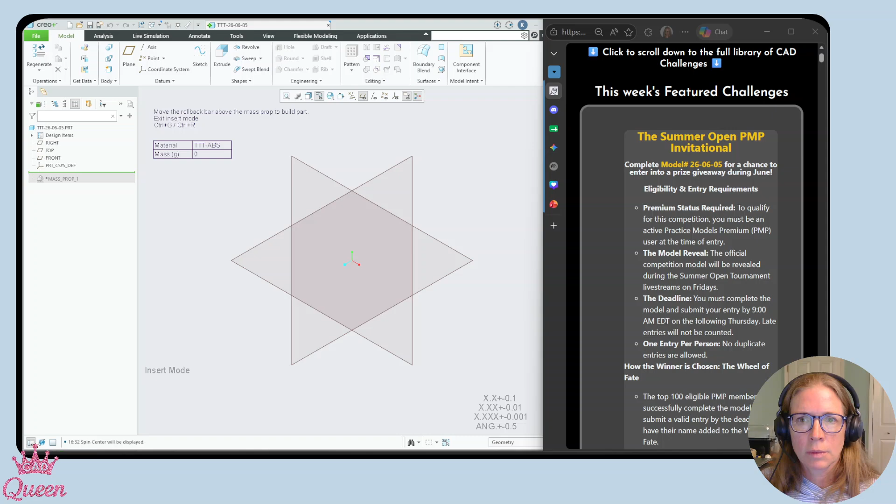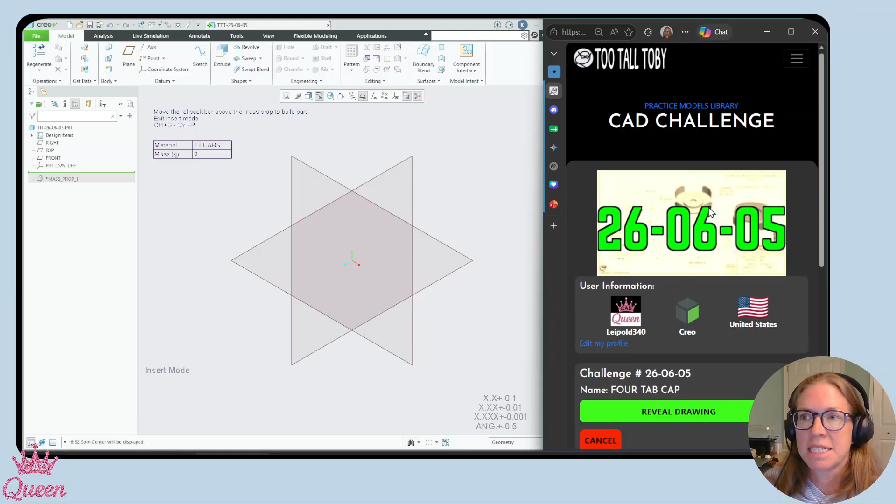260605. I have not tried this, I haven't done this yet. Jumping right in, we'll see how it goes. So we are in grams, and the average solve time is 7 minutes, so let's see how we do.

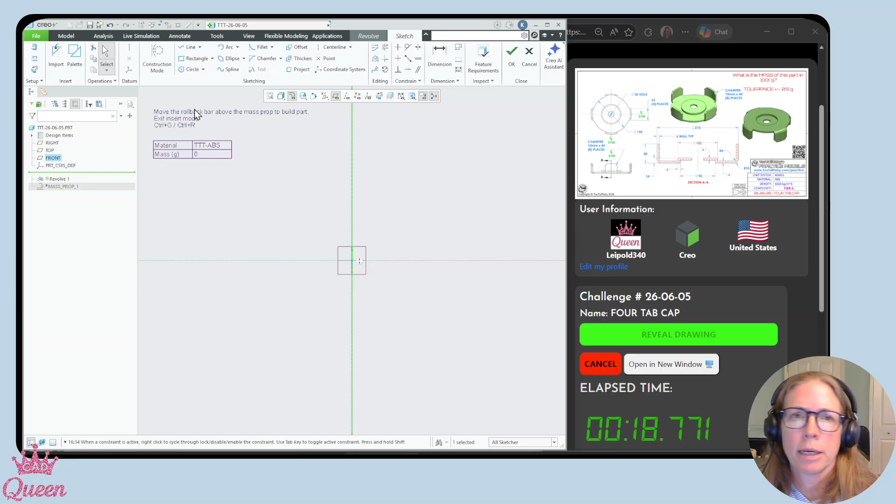All right, so I think I'm going to revolve. Actually, it looks kind of sheet metal-y, but I'm still going to revolve. It's got circles. All right, outer diameter - let's go with thin wall revolve and see what happens.

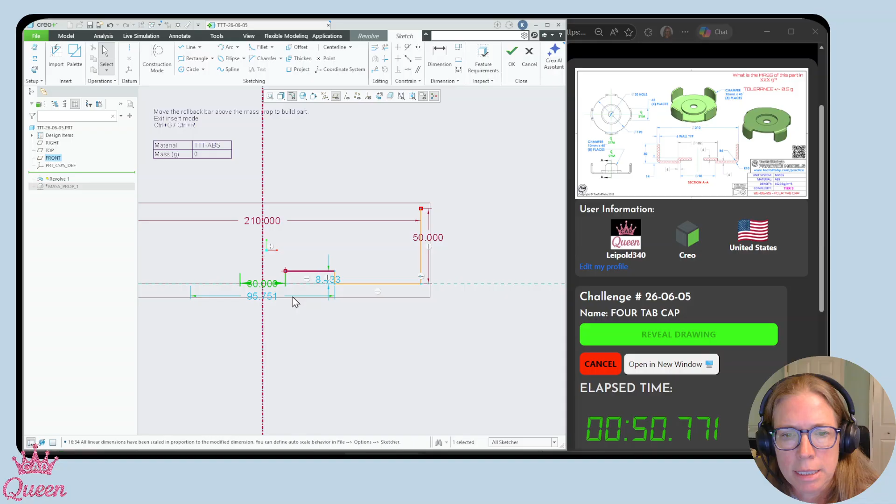210. Overall height is 50. Let's see here, our inner hole is 30. We got 90 on the inside, which I believe is this one when we add the wall thickness.

I think we might have to do some verification and see how we do, because this 14 includes the wall thickness, and the wall thickness is 6. So we'll actually make this 14 minus 6.

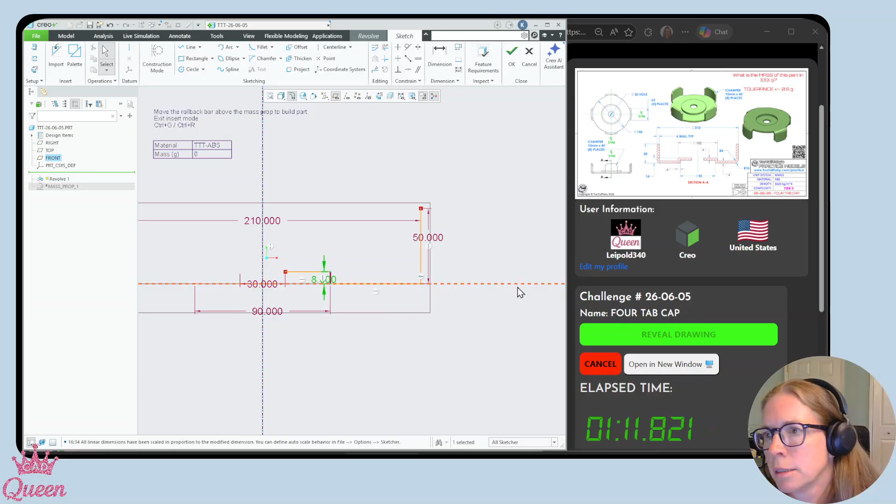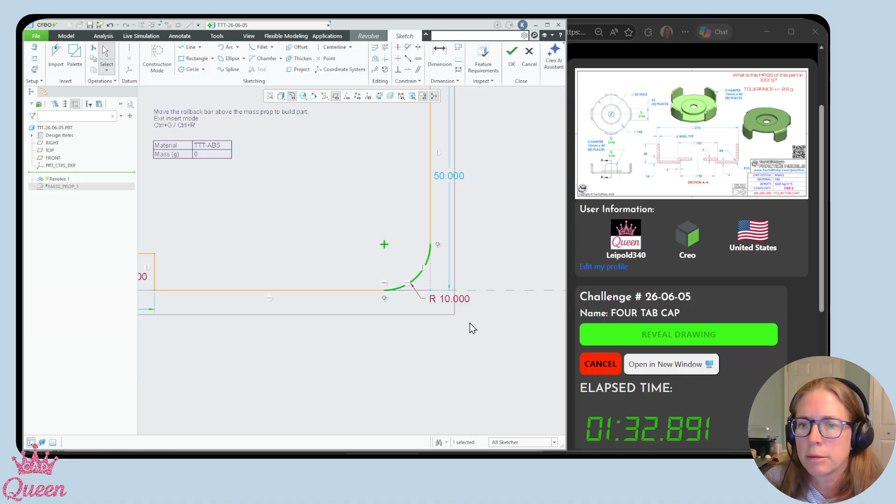And we got one round, so 10 on the outside. So let's pick that corner, drop a fillet, and there we go. Make that 10. All right, I think all the dimensions left the same, so let's click OK.

I got a pop-up over here on the wrong window. It changed it to surface. I want to go back to solid and give it a wall thickness of 6. But we're going to do inside, so I always click that to make sure I'm in the right zone.

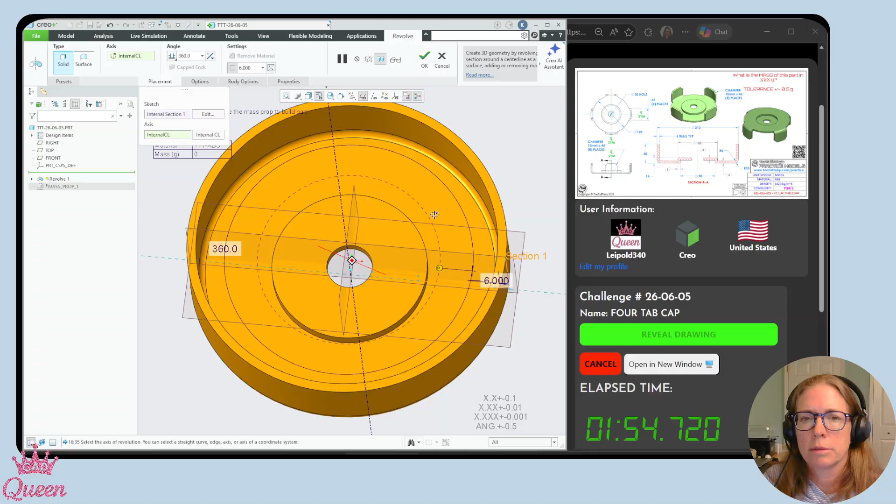All right, let's see. I think that looks pretty good. All right, let's make some cutouts now.

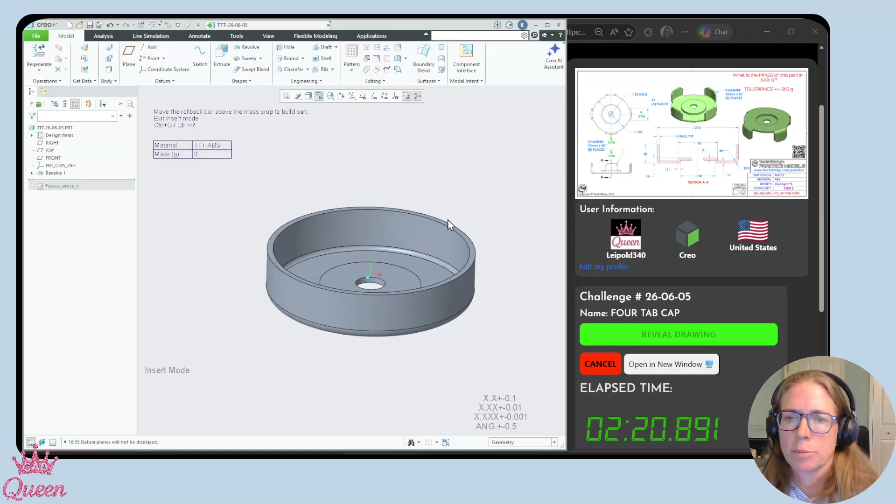So I think what I want to do, it looks like those tabs are pretty straight. I'm going to extrude on this plane.

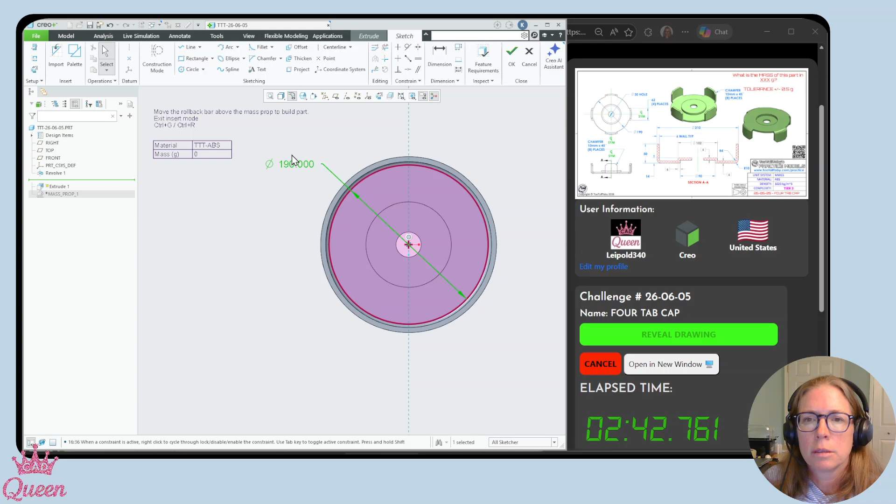Let's get - it's way too big, but we're going to bring it down to 190. Okay, and then we're going to add...

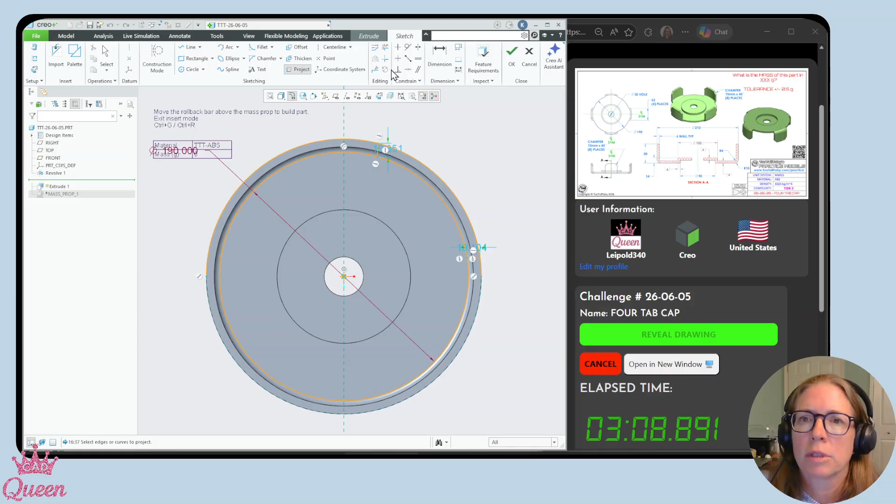I might need to come straight in and straight out. And we're going to need a dimension. We're going to project this geometry. We're going to get rid of a whole bunch.

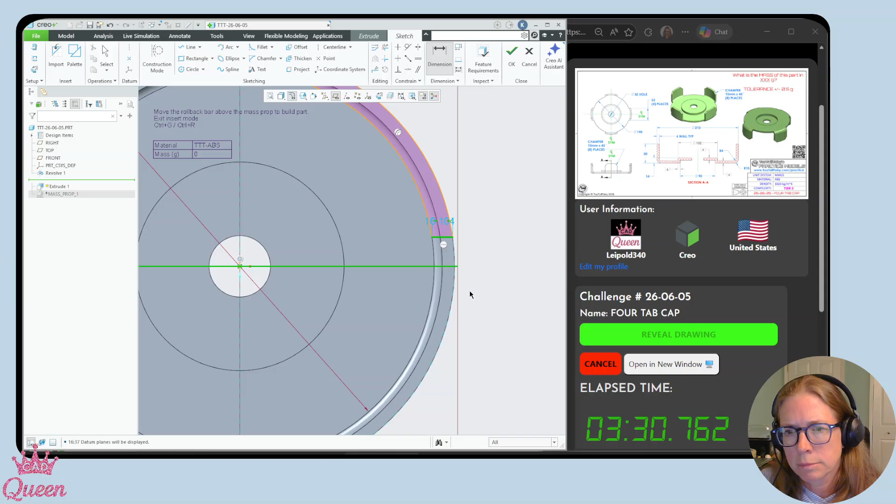All right, so the dimension from here to here is 62 divided by 2. And this will be - oh, where'd my other plane go? Same thing. All right, I think that's my sketch.

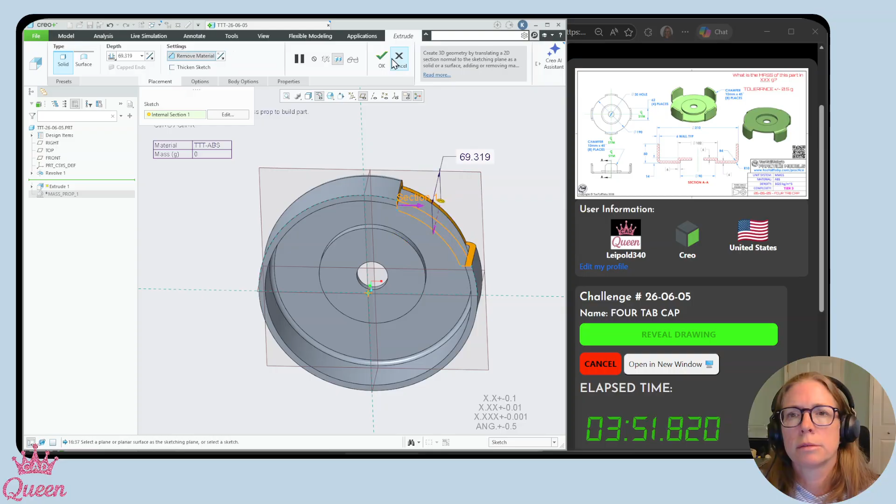So that is gonna - oh yes, that's gonna flip, and that is gonna remove material. And then that extrude will be patterned around the axis.

And we got some chamfers. So I wonder if I could do those two and then, let's see here, how big are our chamfers? 10 by 45.

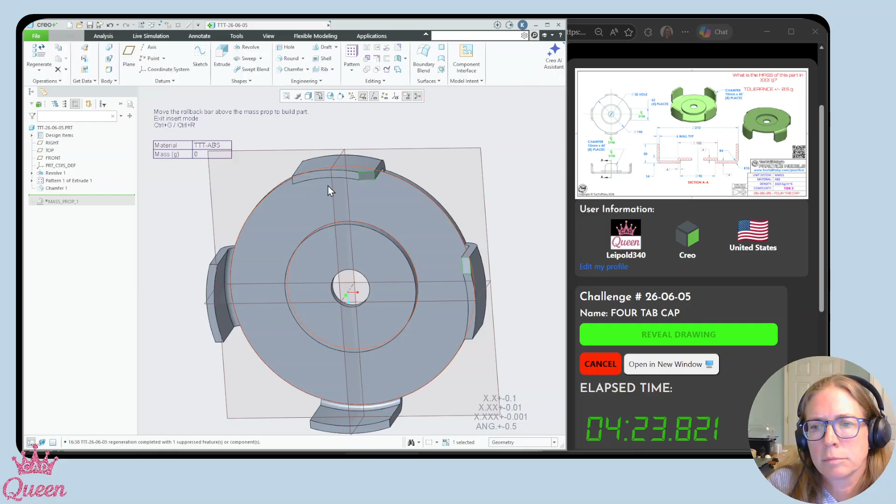So I'm curious if I can take that and pattern it as a reference pattern, because I put them on the sides of that cut - that worked.

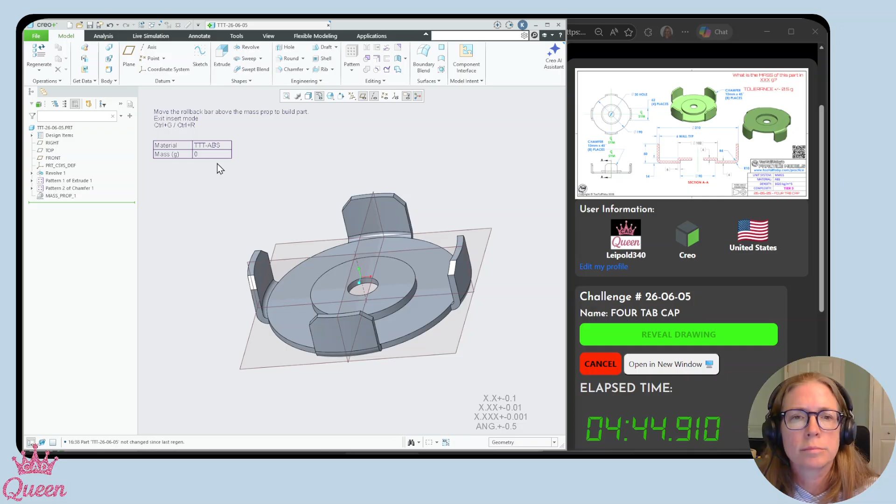All right, let's see if that's right. We're in ABS, right material. Plus or minus 0.5 grams. So I need to do a little tweak here and extend it 1 decimal place.

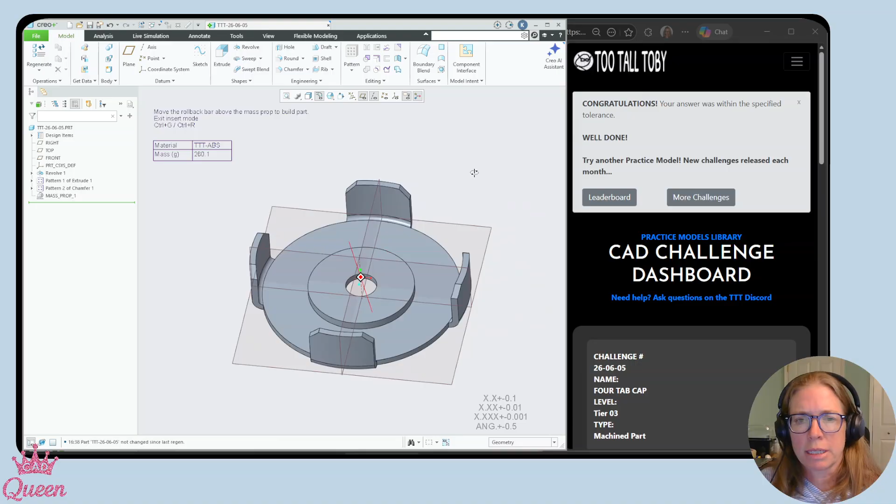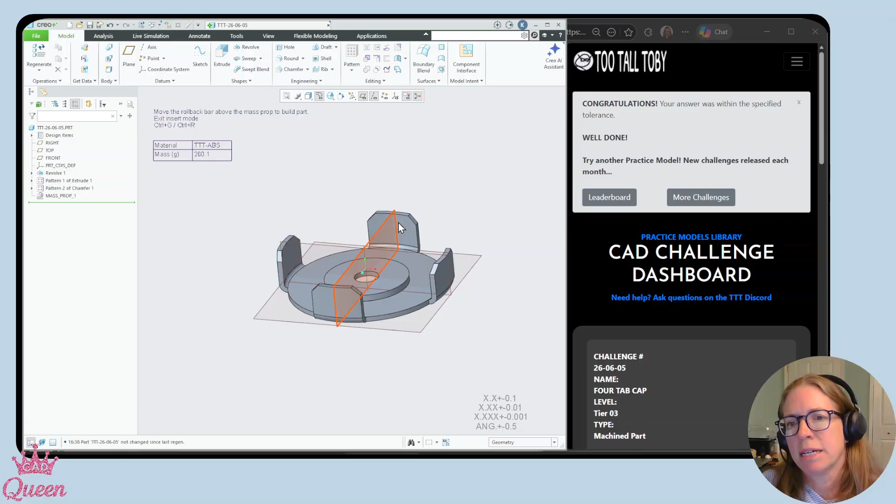What was a quirk there? Anything? I used revolve thin. Unfortunately, when you don't have a closed loop, it automatically switches you into a surface. I'd like it to be able to just pop me right into a thicken option. I could see how you could make the tab and then pattern the tab - that might make a lot more sense than patterning the cut. But when I see round shapes, I go towards revolves.